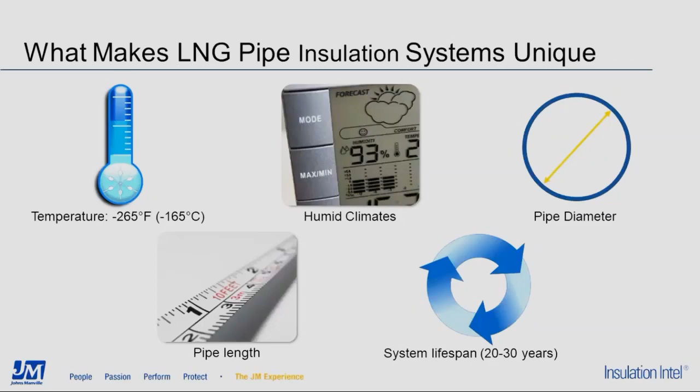We look at the engineered system as a puzzle. You've got the design criteria, the system design, materials, and installation, all of which we're going to talk about today. If one piece of this puzzle is missing or not done well, things don't match up and you're looking for trouble.

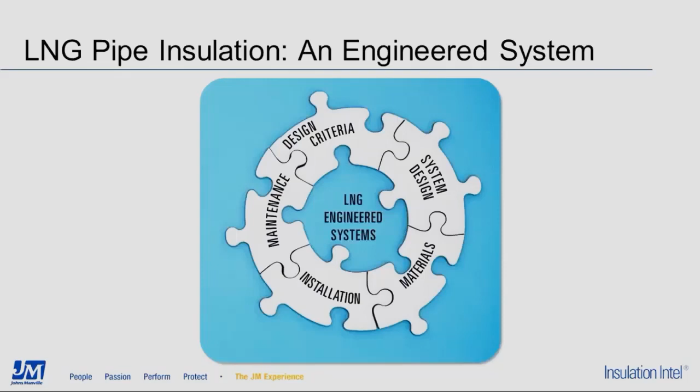And I'm trying to turn it over to you, Jim. I think you have it. I do. Thank you, Jack.

This is Jim Young. I'll be presenting the portions of this webinar on design criteria, system design, and materials. The first of the key aspects that we'll discuss today are the design criteria.

The design criteria are the issues that must be considered when performing the insulation system design. The first seems trivial but is actually probably the most important: why are the cryogenic LNG pipes being insulated? There are many possible reasons, but the two most often considered critical in LNG applications are condensation control, and process control to limit heat gain and reduce boil-off gas. By designing an insulation system to accomplish these two goals, all of the other reasons to insulate will also be largely accomplished.

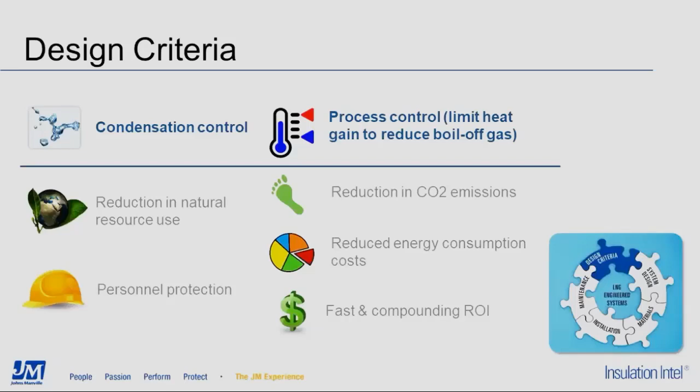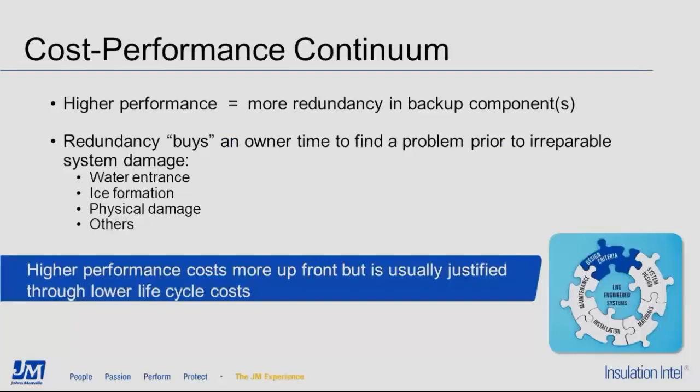There are many other design criteria that must be considered, including specifications, code compliance, desired service life, ambient and physical environment, operating conditions, and the inspection and maintenance plan. However, the most important design criteria is where the facility owner or specifier wants to operate on what I like to call the cost-performance continuum.

An insulation system with higher performance has more redundancy, better materials, and better system design built into it. This redundancy and better materials help prevent problems, and if a problem does occur, it buys an owner time to find the problem prior to irreparable system damage. This damage is most often caused by water or water vapor entrance into the insulation system, which causes loss of insulating ability, ice formation, physical damage, and other problems.

Higher performance costs more upfront, but in LNG pipe insulation applications is usually justified through lower life cycle costs, achieved primarily by yielding a longer lasting insulation system. While the decision on where to operate in this cost-performance continuum is up to the specifier or facility owner, JM recommends a higher performance LNG pipe insulation system design, and this is usually what is done for LNG facilities.

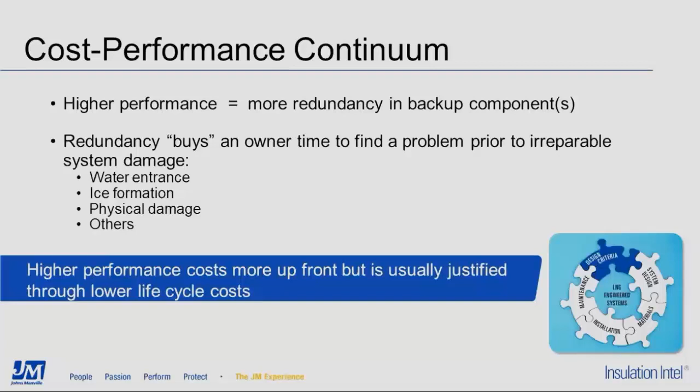The second key aspect we will discuss today is the insulation system design. Based on the design criteria we just discussed, the specifying engineer must perform the insulation system design. This will include a number of important aspects, the first of which is material selection.

This is not just selection of the insulation to be used, but all of the various components of the insulation system as shown here. Today, when we discuss materials, we will only have time to focus on the main three, shown in blue: insulation, vapor retarders, and jacketing. We'll mention other materials briefly, but our focus will be on these three. The other material categories are important, and JM would be happy to discuss them with you offline, but we won't get into the details today due to time constraints.

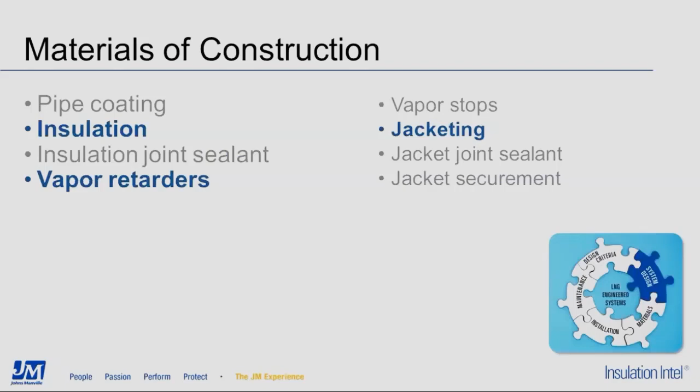Another key design decision is the total insulation thickness and number of layers required. The total thickness is driven by the design criteria chosen, usually condensation control and heat gain limits, but also by the insulation material used. As we'll see later, there's a wide range of thermal conductivity and hence insulating ability among the insulation materials commonly used on LNG pipe.

The number of layers used will be either 2 or 3 for the two most commonly used LNG insulation materials, PIR (polyisocyanurate) and cellular glass. Whether it is 2 or 3 layers depends on the total insulation thickness required. For a total thickness less than around 5 to 6 inches, a double layer system would be used. Above this, a triple layer insulation system would typically be used. Again, that's for cellular glass and PIR.

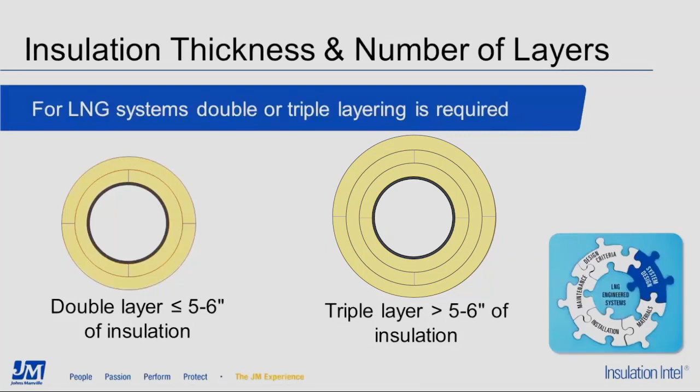The next key design decision is how the insulation joints will be staggered. This applies to both the circumferential or butt joints as well as the longitudinal joints. JM recommends that all joints between layers be staggered.

In addition, the joints in the outermost layer should be located at about the 3 o'clock and 9 o'clock positions on the pipe. Forces exerted on the pipe are most likely to occur at the top and bottom, the 12 and 6 o'clock positions. So it's best to locate the joints where these forces will not be exerted, which would be the 3 and 9 o'clock positions in the outer layer.

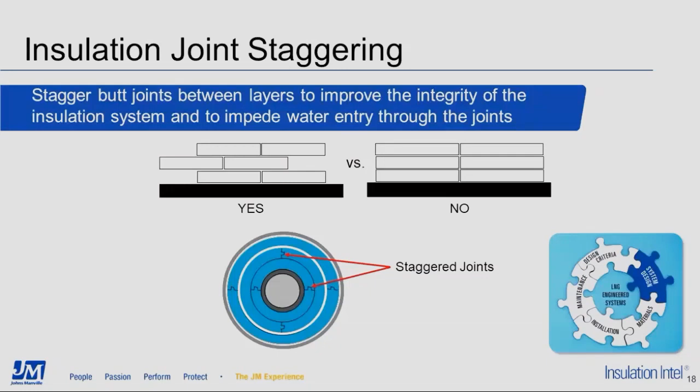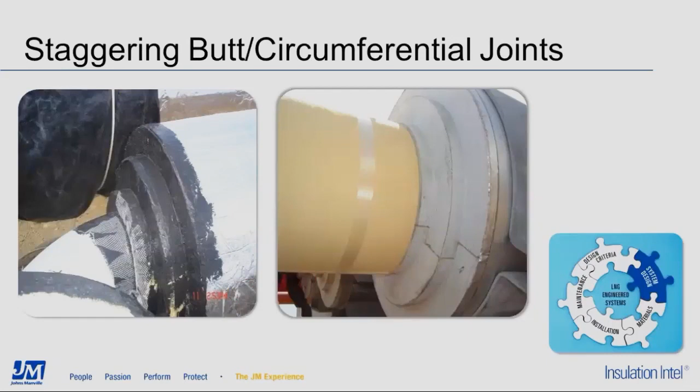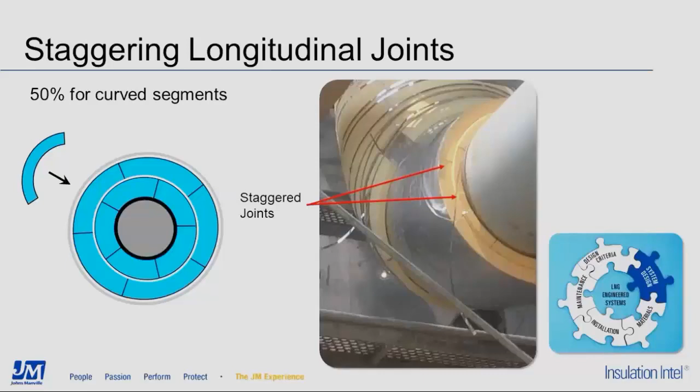The even application across the entire joint face maximizes both joint strength and joint resistance to water or water vapor movement through the joint. Lastly, joint sealant is typically not used on the innermost layer with PIR insulation, but is required on all joints in the second and third layers.

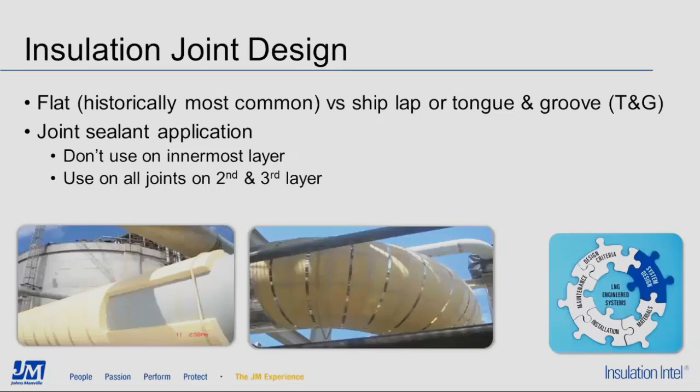This allows the innermost layer, which sees the greatest temperature change from installation to operating temperature, to best accommodate any expansion or contraction that occurs. In the left picture, you can see that no joint sealant is applied to the innermost layer, while the right picture shows the use of joint sealant on the second layer. Where joint sealant is used, it should be applied as a thin layer across the entire joint face. That's a key design attribute.

The next key design aspect we will discuss is contraction joints. There are many designs for and opinions about where contraction joints should be used. They are most commonly used in the second and third layers for PIR insulation systems. JM can assist with design and spacing of these. There are calculations that can be used, and JM can help you with those to determine the spacing.

They are usually constructed by filling a small annular gap between adjacent insulation pieces with mineral fiber insulation and then compressing this fiber. If this gap opens up due to contraction, the mineral fiber will expand to fill the gap. Expansion joints in adjacent layers should be staggered from each other, again to provide a more tortuous path for water or water vapor to pass through them.

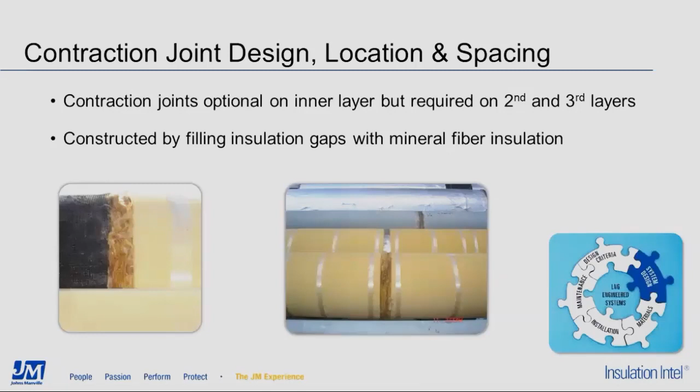The next key design aspect is pipe supports. Insulation must be used at pipe supports, and this can take many forms. On rare cases, super strong resin-impregnated wood is used, but this has very poor insulating ability. More commonly, high-density PIR is used at the supports, and this can range in density from, say, 10 to 20 pounds per cubic foot, with a higher density having much higher compressive strength, but also having comparatively poor insulating ability versus the neighboring PIR insulation, or cellular glass insulation.

High-density versions of Trimer PIR from JM don't get as high as 10 or 20 pounds per cubic foot, but they can work in some support applications. This would be PIR in the range of 4 to 6 pounds per cubic foot. Using this can often yield acceptable strength at the supports without sacrificing insulating ability. JM can offer help with selection of PIR necessary at pipe support locations by helping you to perform the right calculations to verify that the strength of the insulation would be sufficient at the support location.

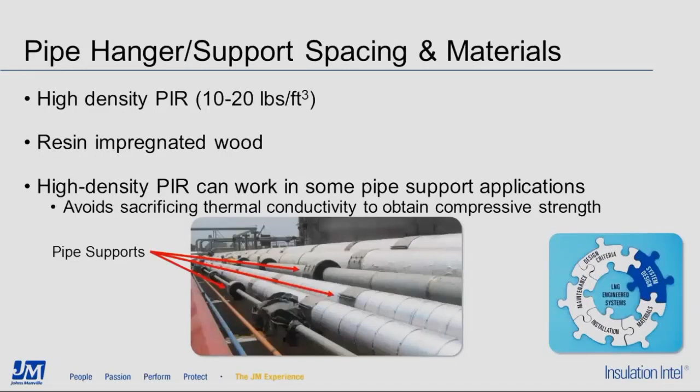Another key design aspect is selection and design of the vapor retarder system. This is of vital importance to the performance and longevity of the LNG insulation system. We will discuss the vapor retarder material choices later. The system designer must decide how many vapor retarders to use and where they are to be located. Typically, a primary vapor retarder is used on the outside of the outermost insulation layer, and a secondary vapor retarder is used under the outermost layer of insulation.

The system designer must also determine how the vapor retarders will be closed or sealed and how they will be held in place. The vapor retarder used on elbows and fittings may differ from that used on the straight pipe. For example, a mastic fabric mastic primary vapor retarder system might be used on the non-straight pipe, that is elbows.

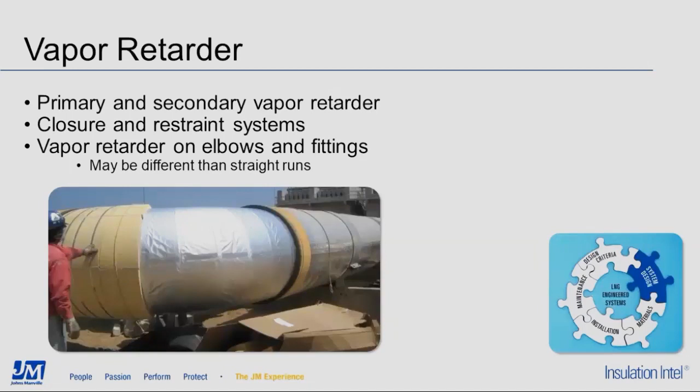The next key aspect is the design and location of vapor stops. The key purpose of a vapor stop is to isolate any damage caused by water penetration into the insulation system. Vapor stops are typically required at specific places on LNG piping, such as on either side of valves or flanges. In addition, they are also recommended to be located periodically on long runs of pipe. The frequency of their use depends on where the specifier wants to operate on the aforementioned cost-performance continuum.

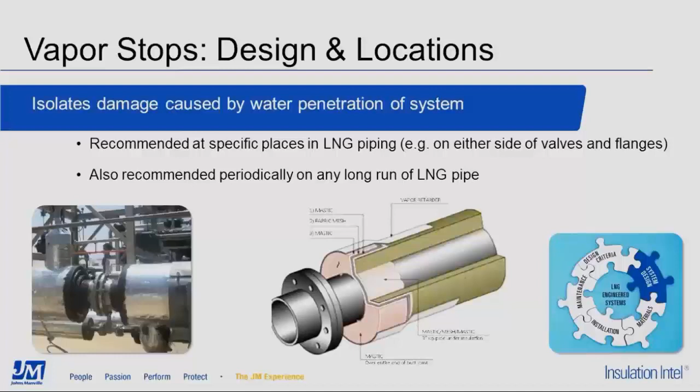The next key aspect is the design of the metal jacketing. We'll discuss metal jacket material selection later. The metal jacket joints should be oriented to naturally shed water or face away from the prevailing winds. There are many other aspects of LNG pipe insulation system design that we do not have time to discuss today, but JM can definitely help with many of these.

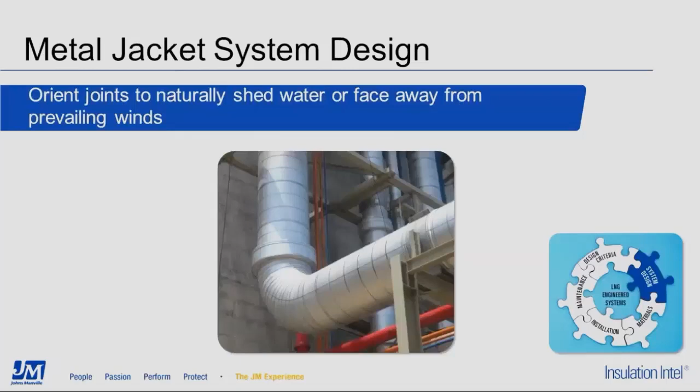Now let's turn our attention to the materials used in LNG pipe insulation systems and selection of these materials. As mentioned previously, there are many different materials used in LNG pipe insulation systems, but we will talk today mainly about the three shown here in blue: insulation, vapor retarders, and jacketing.

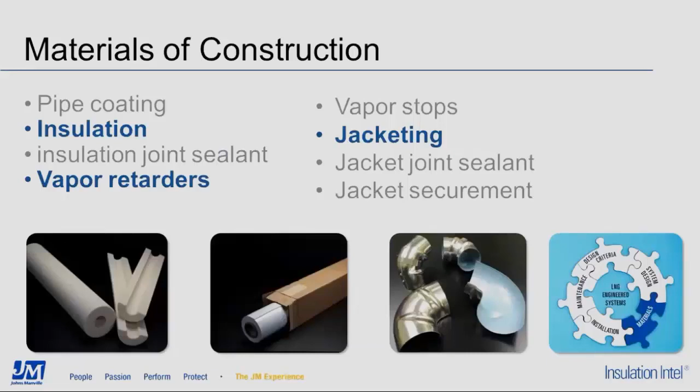So let's start by discussing the insulation materials. The main purpose of insulation is to reduce heat flow through it, but it also helps to reduce water entry into the insulation system. Insulation performance depends on many factors, and there is no perfect insulation material that excels at all factors.

Some of the factors that are important when choosing an insulation material are density, thermal conductivity, commonly called K factor in North America, or lambda outside of North America, chemical and water resistance, cost, availability, and thickness requirements. The selection of an insulation material should be based on the relative importance of each of these factors to your specific situation. Consider your design criteria and where you want to operate on the cost-performance continuum when making this choice.

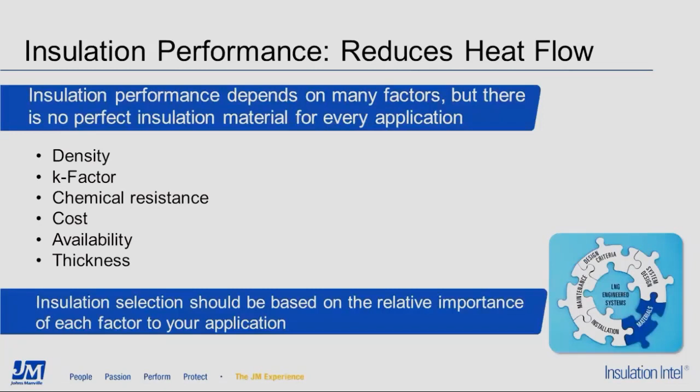Far and away, the two most commonly used insulation materials in LNG pipe applications are polyisocyanurate, abbreviated usually PIR, because that is quite a mouthful, like I said, we have the short acronym. Johns Manville makes a premier grade of PIR for use in LNG applications called Trymer 2500. The other material that's commonly used is cellular glass. Globally, the use of cellular glass on LNG pipes is small compared to the much more often used PIR. Both PIR and cell glass are closed cell.

The density of PIR is roughly 1/3 that of cellular glass, so insulation systems based on PIR weigh a lot less than cell glass systems. PIR is easy to fabricate both in the shop and in the field and is comparatively quick and easy to install. Cellular glass is harder to fabricate for several reasons. It's made of glass, which requires special tools, and it comes in smaller pieces. PIR is significantly lower in cost per board foot, which is the pricing unit typically used by the manufacturers.

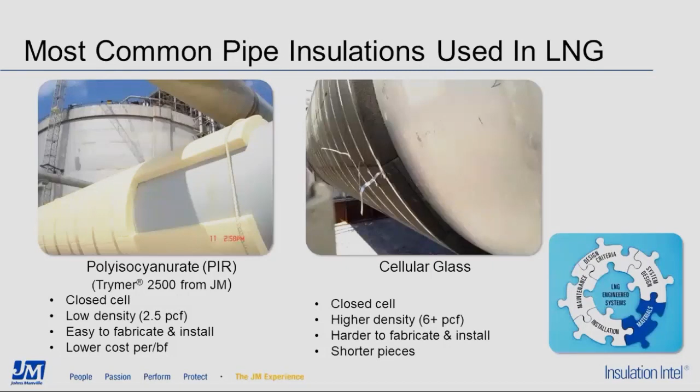The better lower thermal conductivity of PIR leads to a lower insulation thickness being required compared to cellular glass. This in turn leads to less material being required for PIR, which yields lower material costs. The graph on this slide shows an example of the thickness of PIR and cell glass needed for a typical LNG scenario at various levels of relative humidity. Of course, as the relative humidity increases, the thickness required for both materials increases, and this increase begins at about 87 to 88% relative humidity, as you can see in the graph.

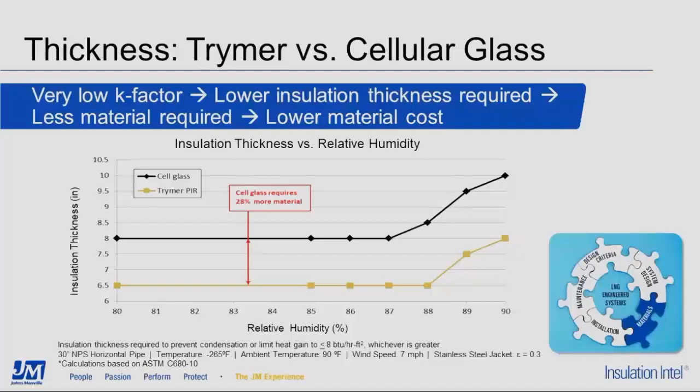Below that relative humidity level, the design criteria of limiting the heat gain dominates. But at all levels of relative humidity, the thickness required for cellular glass is 1.5 to 2 inches greater than that of PIR. Converting this thickness into an amount of material required, the cell glass would require about 28% more material than would an insulation system based on PIR.

Let's consider how the K factors, or lambda, that is the thermal conductivity, of several LNG insulation materials translate into the total thickness required and the number of layers required. As mentioned on the previous slide, the superior, that is lower, thermal conductivity of PIR compared to cell glass translates directly into a lower thickness being used, but this thickness reduction is only part of the story. Using PIR insulation also yields an overall outer insulation circumference that is 10 to 20% smaller than that of cell glass. This smaller outer circumference means less material is used for joint sealants, vapor retarders, metal jacketing, etc.

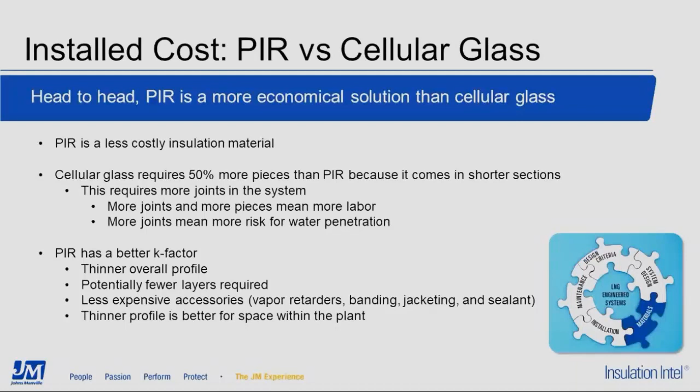Insulation system cost and performance is only part of what has to be considered when selecting material. The long-term performance is also of great importance. The performance of PIR insulation in LNG applications is outstanding. I like to say nothing succeeds like success, and we have a lot of history and a lot of success.

PIR in general, and Trymer PIR specifically, has been used in the majority of the world's LNG facilities, where it has demonstrated 20 to 30 plus years of service life. This has occurred in all parts of the world, including the USA and Canada. So to conclude this area, PIR insulation on LNG pipes works well and has worked well in hundreds of North American and global facilities for many, many decades.

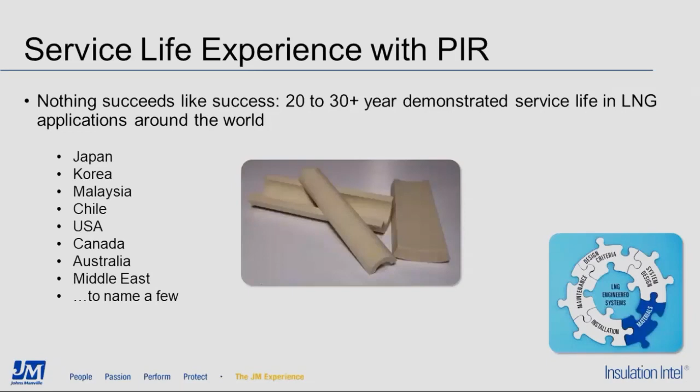Now let's turn our attention to the next material we will discuss, which is the vapor retarders. Selection of vapor retarder must be based on its permeance, which simplistically is the rate at which water vapor passes through the vapor retarder. Since the main purpose of a vapor retarder is to severely limit water vapor movement toward the pipe, the permeance of the vapor retarder system is its most important property.

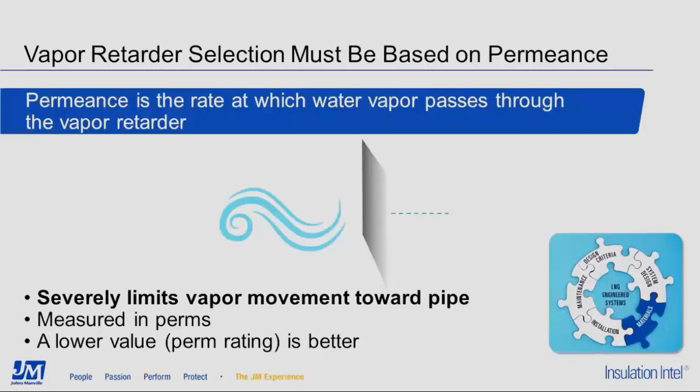Permeance is measured in units of perms, and a lower perm rating is better. The typical requirement for vapor retarders on an LNG pipe insulation system is a permeance of less than or equal to 0.01 perms. However, watch out for ideal lab performance compared to actual real-world field performance.

There are vapor retarder materials which might have a lab result of 0.01 perms with no joints present, in pristine lab condition and carefully controlled flat test geometry, but which would not work well in an actual LNG application due to the rugged environment and the presence of so many joints.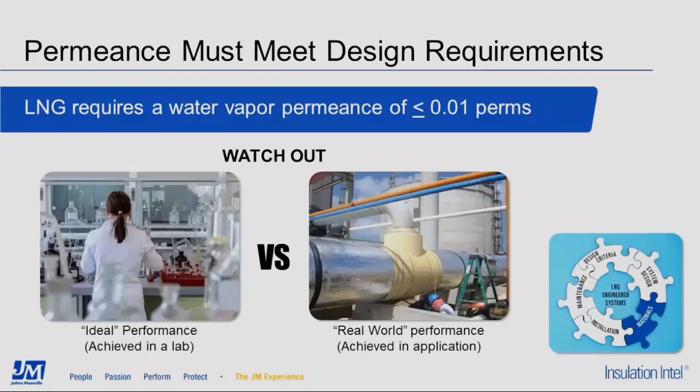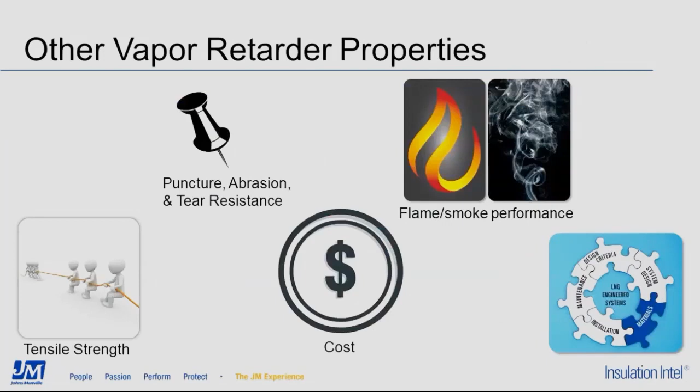Besides its permeance, there are other important attributes to a vapor retarder. These include puncture, abrasion, and tear resistance, flame and smoke performance, tensile strength, and of course, cost.

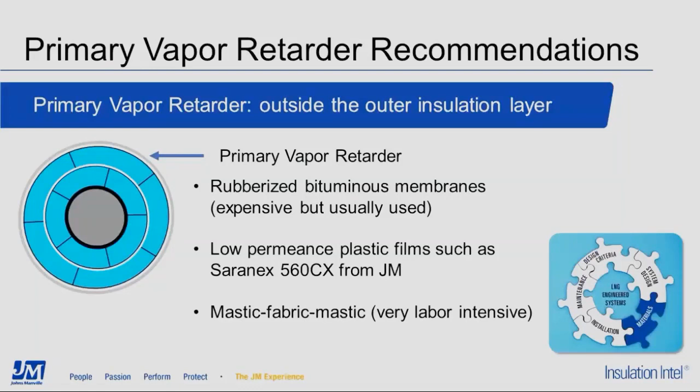In general, there are some specific materials recommended for use as vapor retarders in LNG pipe insulation applications. For the primary vapor retarder, the three most commonly used and recommended materials are rubberized membranes, which are expensive but the most commonly used materials; low permeance plastic films like our Saranex 560CX, though there are other types of plastic films as well; and fabric mastic, which is very labor-intensive and relies heavily on the skill of the installer to achieve the desired thickness, because without the proper thickness, fabric mastic will not yield the correct performance. Thickness is solely dependent upon the application.

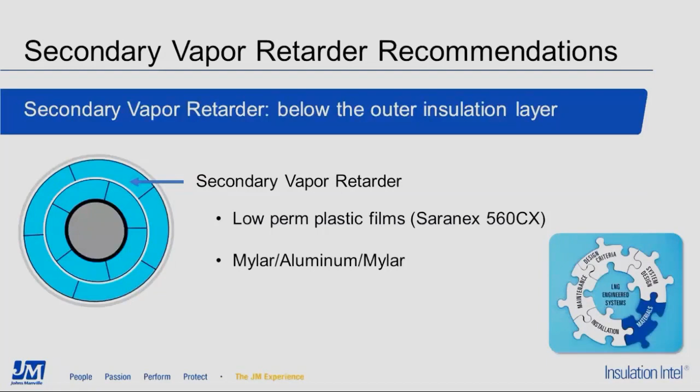For the secondary vapor retarder, there are two materials typically used: low permeance plastic films like the Saranex 560CX from Johns Manville, and mylar aluminum mylar, or MAM type films, also called polyester aluminum polyester. Those mean the same thing.

Now I'll turn the presentation over to Jack, who will address the jacketing materials, installation, and maintenance portions of the webinar. It's been a pleasure. Thank you.

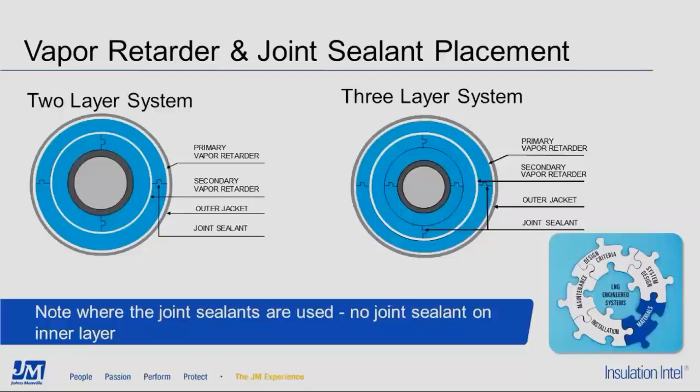Thanks, Jim. So jacketing, the primary purpose of jacketing systems for all installations, but particularly the low temperatures we see in LNG, is it protects the system, and especially the vapor retarder, from damage from physical abuse, punctures, and even the UV rays from sunlight.

The jacketing most often used is aluminum and stainless steel, and in many applications there's more stainless steel jacketing than aluminum, because in a lot of the areas where you see LNG installations, they're in very corrosive environments, and there are also areas with high flammability concern.

Jim talked about the thickness of the insulation, noting that relative humidity of 88% and above causes the thickness to significantly increase. If you're running out of room to cut down on insulation thickness, consider using painted aluminum, like white, to help control condensation in those applications.

In all cases, the metal jacketing should have a 3-layer, 3 mil thick, factory laminated polyfilm moisture barrier on the interior surface. This helps prevent corrosion on the interior surface of the metal jacketing, which manifests itself in pitting, and pitting becomes a hole. You don't want holes in any of the jacket systems in LNG applications.

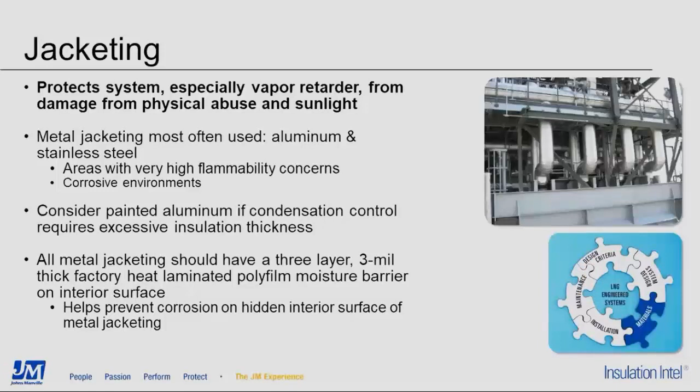There's also a variety of attachment devices for metal jacketing, mainly to hold it in place. For the LNG applications and the temperatures we're dealing with, bands only are required. There should be no rivets, no screws, no staples, nothing that might damage the vapor retarder.

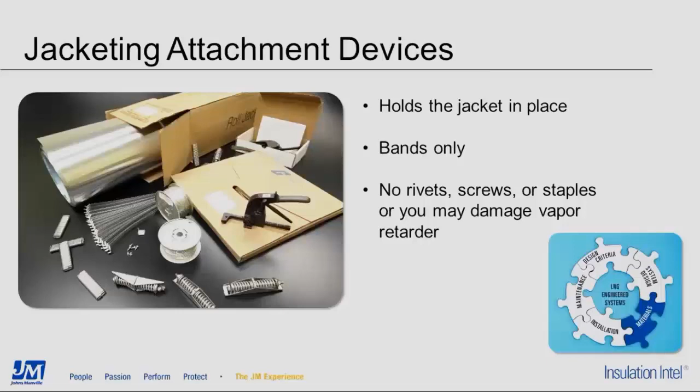One thing we're asked about fairly often is jacket joint sealant, which is caulking applied to the jacketing system to eliminate water entry through the jacketing joints, circumferential and longitudinal. We don't have any test data or science on this, but it does seem to make sense. One caution is it may also limit water evaporation from the inside of the insulation system out, but in LNG applications it might be a sensible thing to do. Again, we just don't have any data on it.

But if it is specified, the sealant should be applied on the inside joints of the jacket, longitudinal and circumferential joints, and not as a bead on the outer joint lip.

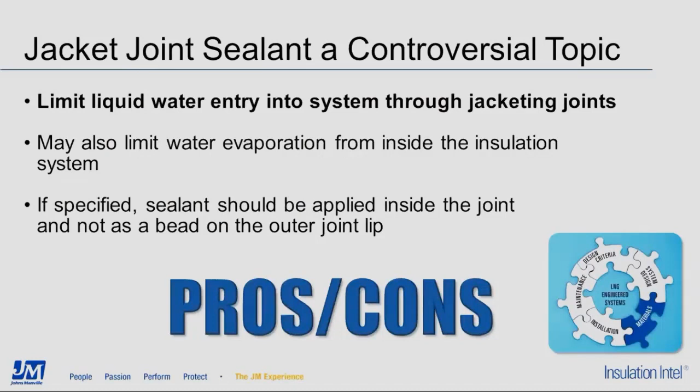Now let's talk about installation, which I think is one of the most critical parts of this puzzle of an LNG engineered system. At the temperatures we're talking about here, anything that's not installed properly is not going to last anywhere near its anticipated life cycle. You can take the best design, the best material, and have an improper installation, and the system will fail.

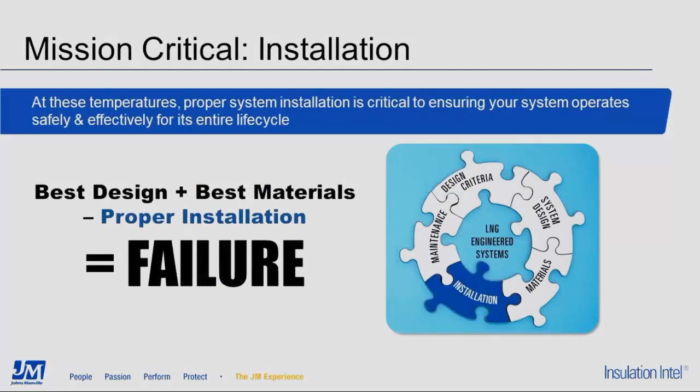So what are the requirements of a successful installation? The first thing is the selection of the contractor. The contractor must be familiar with the materials and the temperature ranges that we're talking about in LNG applications. I can't stress how unique it is, and the skill level you need with your contractors.

One of the key issues is the proper application of the joint sealant. As Jim mentioned, it must be on both surfaces, thin layers, and definitely not on the inner layer, but a thin layer of joint sealant on both joints that are going to be touching each other on the insulation materials. And the continuity of the vapor retarder must be installed without pinholes, without punctures, and it must be tight so it can function as the vapor retarder.

Vapor stops are key as well. Jim mentioned the vapor stop application must go from the pipe all the way to the primary vapor retarder and be completely sealed. Expansion and contraction joints must also be designed into the system. We have recommendations, but the frequency depends on the installation, and the engineers usually specify that.

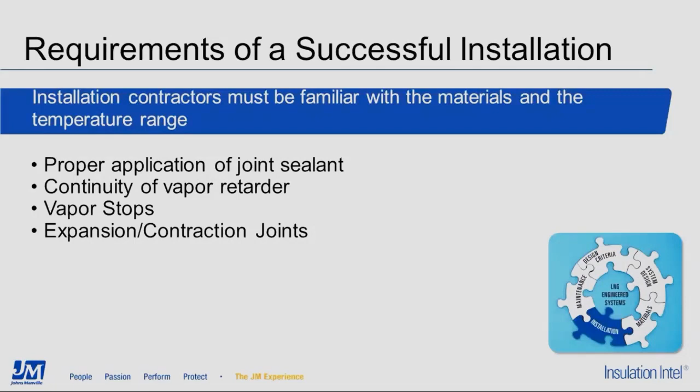Outdoor, everything is pretty much outdoor in LNG, and they're also on the coast, generally high humidity areas, where overnight dew is going to be on everything by the time you show up in the morning. In addition, in coastal applications, there's a lot of rain that occurs any time of the day or night.

So we recommend the installation be done in completable sections for that day. Only insulate what you can cover with a vapor retarder completely that day. If you can't finish it that day, you're going to have to cover it with tarp or visqueen or some other plastic sheet, but ideally it must be done that day just due to the climates we operate in.

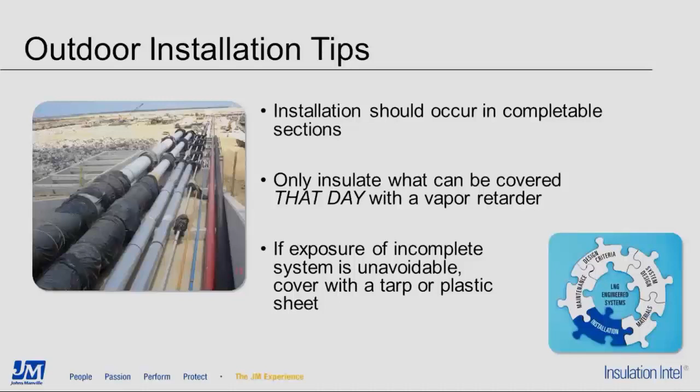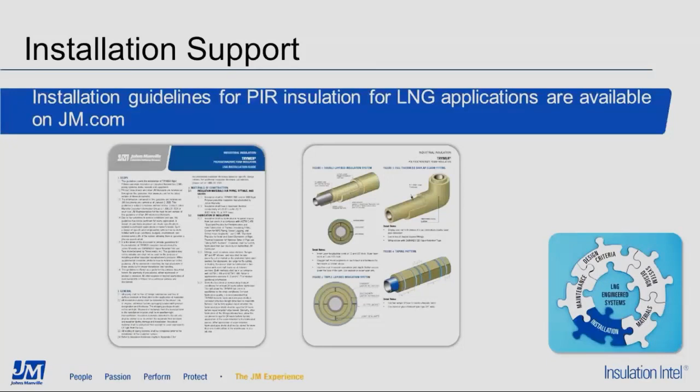At Johns Manville, we have several means for you to get installation and design support. These items are on our website, one of which we're showing here, which is the installation guide for LNG systems for Trymer. But call us for any help you need or visit our website.

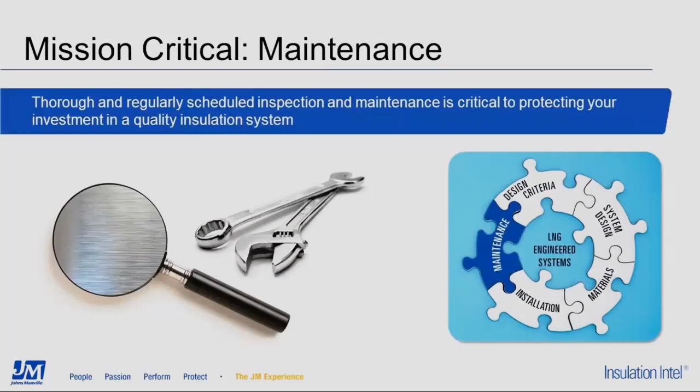And finally, maintenance. Maintenance is the next critical part. Once it's designed and installed properly, now you've got to maintain it. If you want it to last 20 to 30 years, you can't just put it on and ignore it. The insulation system is an asset that you really want to take care of.

We're sometimes asked, how often should I inspect the system? Well, it depends on many factors. Ambient condition is the key thing to consider. Some of these installation locations have very harsh environments, very high humidities, very hot temperatures.

On the coast where there's ocean spray and possibility for corrosion, those kinds of systems will certainly require more frequent inspection than not.

In addition, there's system complexity. Installation in cryogenic applications for insulation, vapor barriers, vapor stops, and everything associated with it is an extremely complex system, and due to that complexity, you'll want to inspect your system more often than not.

As the systems age, you may have problems with the jacketing coming loose, or you certainly want to look for any water or moisture problems, and particularly ice. If you've got ice, you're in trouble.

All these systems are important, and the designed system quality will have some impact on how often you should inspect your system. Remember the cost performance continuum that Jim discussed earlier—a higher performing and higher cost system up front will also need less inspection and less maintenance down the road.

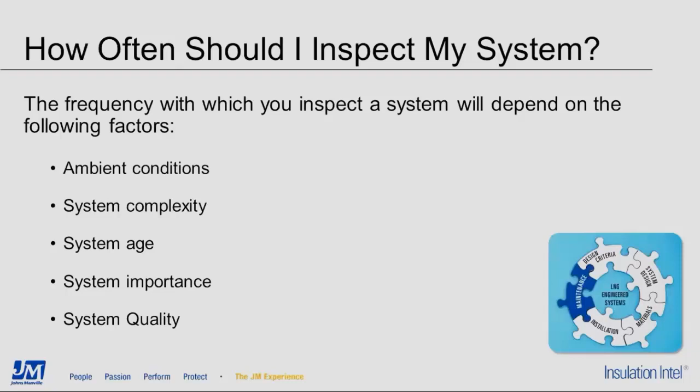So what do you really look for? Well, the primary thing is any moisture, particularly ice, at any low spots in the system or on the pipes. A low spot might be the middle of the pipe between two support shoes, or on a vertical application at the support rings, or certainly at the bottom.

You also want to look for any holes or breaches in the jacketing or in the vapor retarder. If there's a hole in the jacketing, odds are you're probably going to have a hole in the vapor retarder too. You want to fix these immediately.

Loose banding or loose jacketing will obviously reduce the protection function of the jacket for the vapor retarder. And caulking failure, especially at flanges and valves or any other joints—any caulk is not permanent, and to expect multiple years out of a caulk joint, whether it's a hot or a cold system, is pushing your luck.

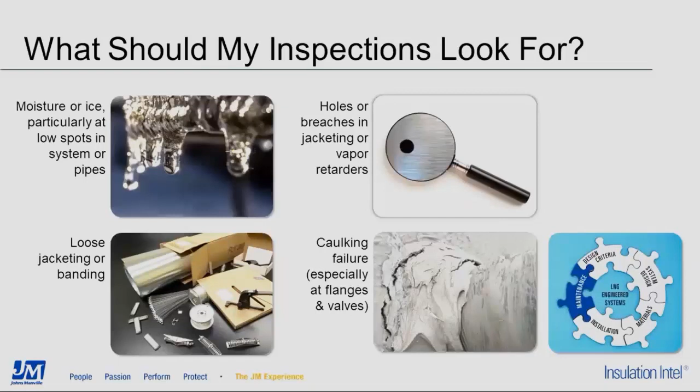Then we've got the issue of minor problems versus major problems. If you're going to have a problem, you want it to be minor. If you catch it early, correcting it's a lot easier, less expensive, and maybe you don't even have downtime to correct it.

What is a minor problem? Well, look for evidence of ice or water infiltration into the system. If it is minor and you catch it early and you're watching out for it, you can fix it immediately without having to shut down the entire process.

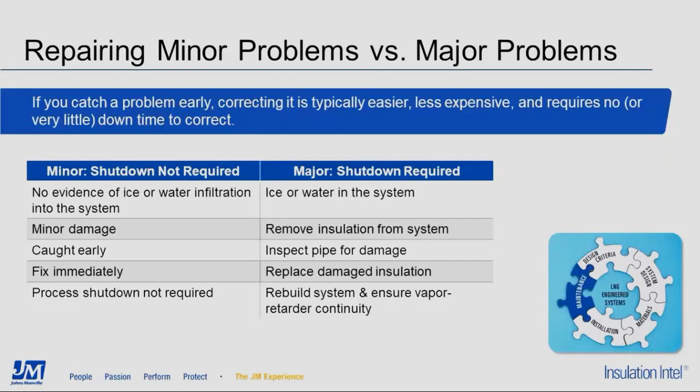Major shutdowns are going to be required if you already have any ice or water in the system. That's going to require removing the insulation, inspecting the pipe for any damage, and then rebuilding it completely to ensure the vapor retarder continuity. And that kind of repair will require downtime.

So to conclude, pipe insulation in LNG must be engineered. It's a unique system, and you really need to treat it as such. The repairs are going to be extremely costly and very difficult, and as I just mentioned, it requires a shutdown of the system.

Experienced installers for both the initial installation and all the maintenance are required. I think the installer is the key to everything here, so you've got to carefully select them.

There are also significant acoustic challenges in LNG systems, which will be included as a subject in another webinar we will be having upcoming here shortly. But again, executing on the 5 key aspects will help ensure your systems operate as they're engineered for as long as they're engineered for, if you keep up with the maintenance—20 years, 30 years.

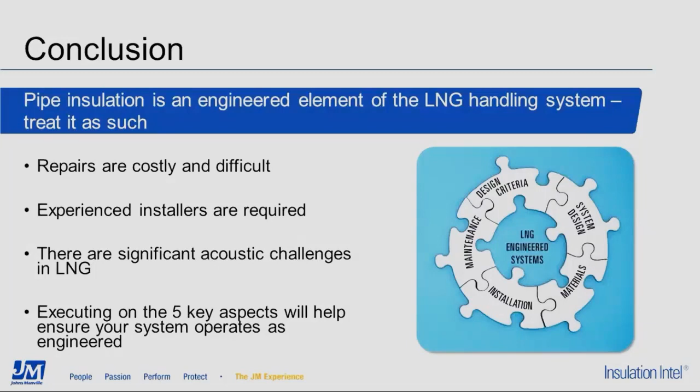All right, thank you, Jack and Jim, for that presentation. Jack, if you want to pass the ball back to me, I'll go ahead and take us through some additional resources. Just trying to get it set up. I'm all set. Should have it. Okay, I got it. Thank you.

So we do have some additional resources for anybody who is looking for more information about LNG or even high temperature applications. I'm going to walk us through that really quickly, and then we'll get to our questions.

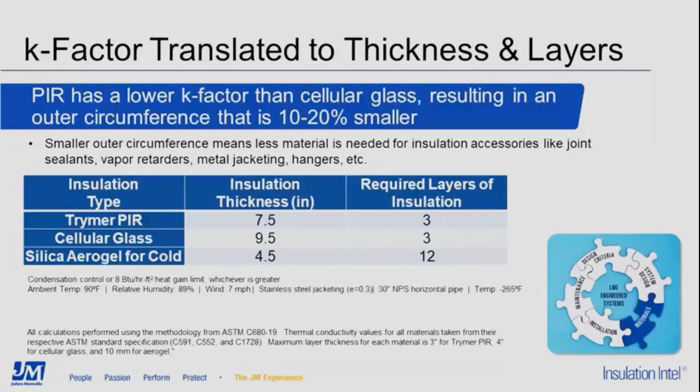Okay, the first thing to realize is that carbon steel pipes can only be used down to a certain temperature. I'm sure metallurgists know why, I do not, but carbon steel pipe is used only down to maybe minus 40, minus 50 degrees F. Below that, carbon steel will embrittle. So in LNG applications, you would never use carbon steel pipes.

So let's wipe out from our minds corrosion of carbon steel pipes for LNG applications and deal only with the corrosion, the CUI potential for stainless steel, which is what would be used in LNG. Stainless steel's corrosion is typically called stress corrosion cracking, or SCC. The stress corrosion cracking of the stainless steels used in LNG pipes is something that has to be thought about. Fortunately, stress corrosion cracking, like all types of corrosion, is a temperature-related phenomenon.

Stress corrosion cracking of austenitic stainless steel will only occur within a temperature range of about 140 F up to around 250 F, somewhere in that ballpark. Below that range, below 140 F, the chemical reaction of stress corrosion cracking is slowed to insignificance. Above that temperature, above 250, maybe a little higher, you cannot get water to the pipe surface because the pipe is too hot. The water will boil off before it reaches the pipe. And water is necessary for stress corrosion cracking to occur.

So in LNG pipe, you're typically not going to be in the 140 to 250 degree temperature range. Even if you had LNG pipe which was used periodically - LNG flowed through it like a loading line, then emptied and allowed to rise to room temperature - you're not going to get up to 140 degrees. So corrosion under insulation for stainless steel pipe should not be an issue in the LNG environment because you don't operate above 140 degrees F.